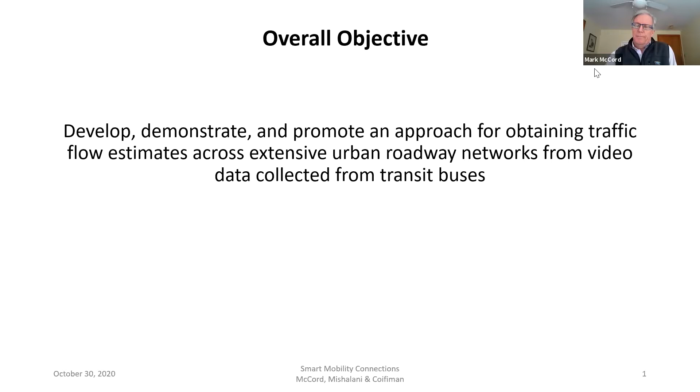I've organized this presentation to give you a quick motivation for what we're doing, to set the concept that we're presently working under, briefly touch on the methodology that we use to take the video and convert it into traffic volume estimates, and then give some of the empirical results we've collected in what I call a multifaceted empirical study. We'll see why it's multifaceted when we get there a little bit later. And then finally, I'll discuss where we see ourselves now and where we see ourselves going with this in the near future.

By way of motivation, let's just accept as a postulate that traffic volumes are used for a variety of engineering and planning purposes in urban areas. And the traditional way we go out and get traffic volumes is what we like to call fixed location sensing. Whether we send our students out over here on the left to sit there and count vehicles as they pass, or click on vehicles as they pass, or we put road tubes down on the right, we're talking about going to one segment, one location, and getting the vehicles through time as they pass.

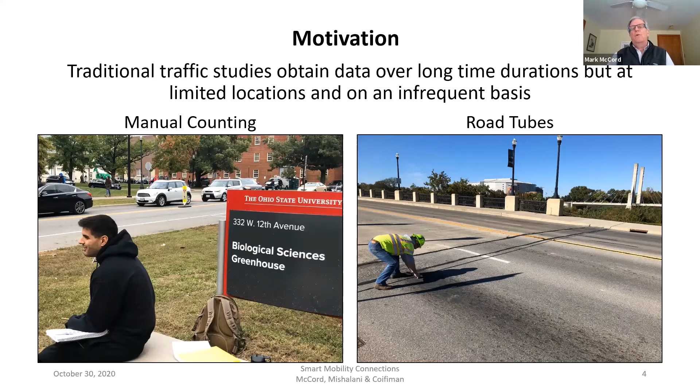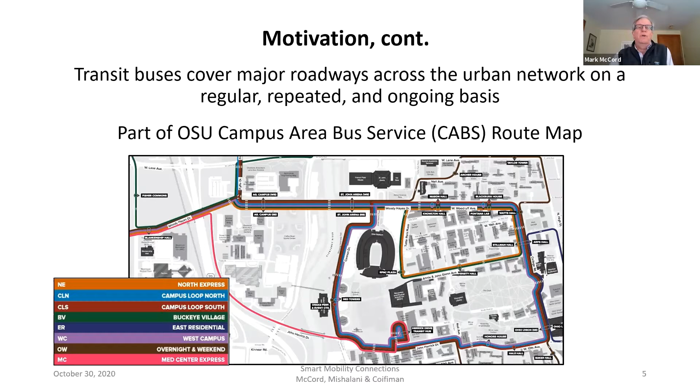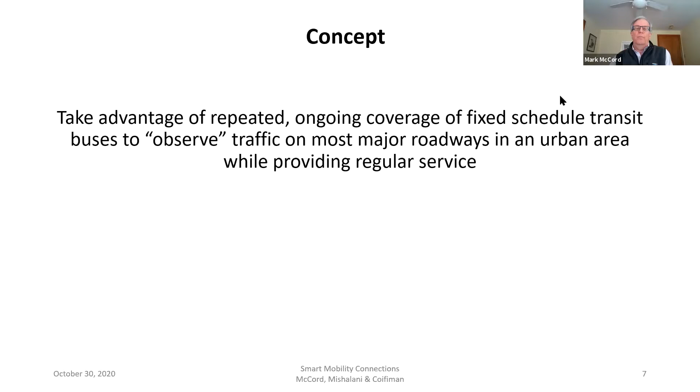So the concept we're working under now is we want to take advantage of this repeated, extensive coverage of transit vehicles while they're out there, to observe, in quotes, we'll see what that means in a minute, the traffic on the major roadways in an urban area. Let me sort of piece this along.

This repeated coverage: I said the traditional way we get traffic volumes, we go out there, think of it as counting or putting a road tube down, and we get data all through time. We get hours and hours of data at this one point. The bus, for example, with its video sensor on, goes by and it's going to see what's happening in a very short duration.

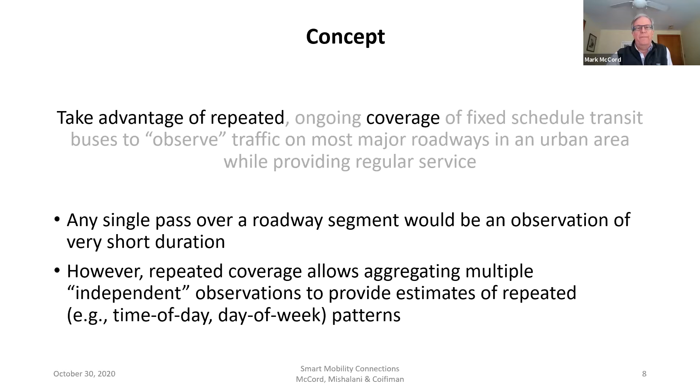So any single pass of a transit bus is going to give us a very short duration observation of the traffic. But because buses go around again and again, cycle after cycle, multiple buses, day after day, we get lots of these repeated short duration observations. And the hypothesis is we can aggregate them to come up with a good estimate of the typical pattern out there. Because it's ongoing, we'd also have the ability to sort of look through time.

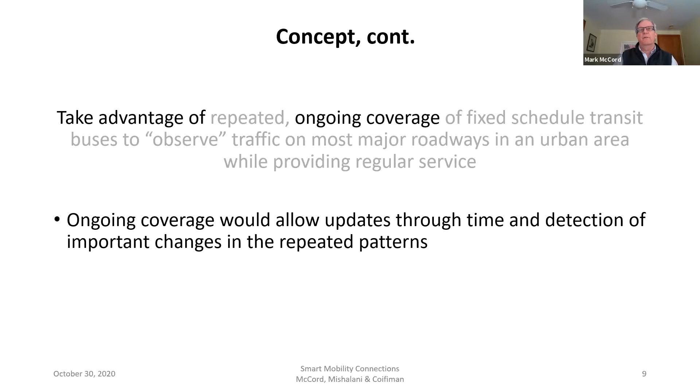When we put road tubes out there, we put them out once in a while, maybe we come back several years later and do that. We don't see what's going on in between. Because we have this ongoing coverage from the transit buses, because they're providing another service, but they're out there anyhow, time after time after time, we can monitor through time.

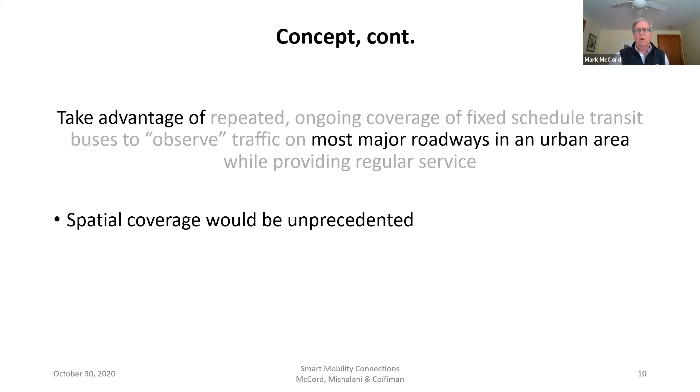Next, we like to say they're covering most of the major roadways in an urban area. Buses travel on the roadways that are of most interest in terms of traffic data. And so we're really getting spatial coverage, which we've never had before from traditional ways of doing traffic monitoring.

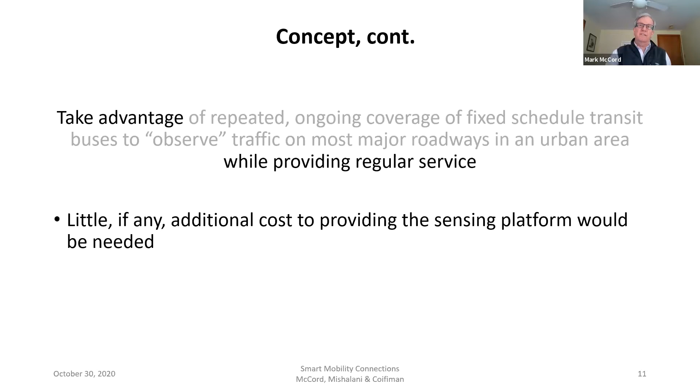And then similarly, because the buses are out there for other purposes, we don't have to pay for the platform. So there's little, I always like to say no, but my colleagues say there's always going to be some additional costs. But we don't have to pay for the platform. It's being paid for because it's providing other service. So we're just piggybacking on the platform. We're not investing in the platform. We'll see with the video, we're not investing in the sensors either.

And then finally, transit buses are a public service. And so the hypothesis here is that because they're in the public domain, it would be a little bit easier, less costly to get their data and use it for public service. We're not going to go through some private company that would be selling the data.

And then finally, as Carly mentioned, we have what we call the Campus Transit Lab at Ohio State. We've been working in transit for quite a while. Transit is a very valuable service, but we all know it's costly and it needs to be subsidized, usually by tax levies that people vote on. So anytime transit can look like what we call a good citizen, in this case providing information for the general traveling public, that would probably be a plus in the overall one transportation system idea.

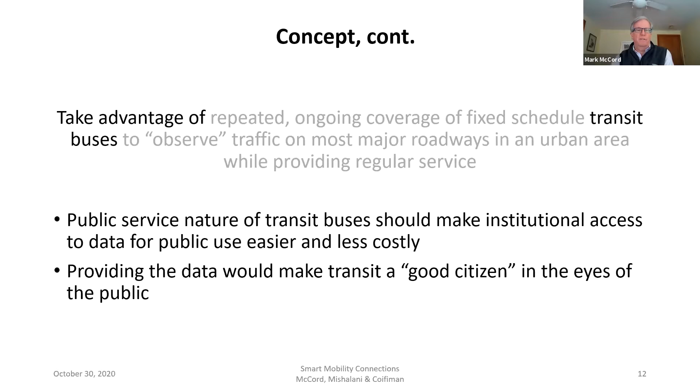So we started this a while ago. Our concept at the time was to take inexpensive sensors, mount them on buses and get the traffic data. And our first take was to use LiDAR sensors. We have real good relationships with the transportation and bus operators at Ohio State University, but we weren't ready to start drilling holes in their buses to put LiDAR sensors on.

So we equipped a van with LiDAR sensors, drove around campus and off-campus roads, got nice pictures of vehicles, and could automatically process the vehicles. We'll get back to that later. That's an advantage of the LiDAR, and we were able to sort of test out some of the concepts we started developing.

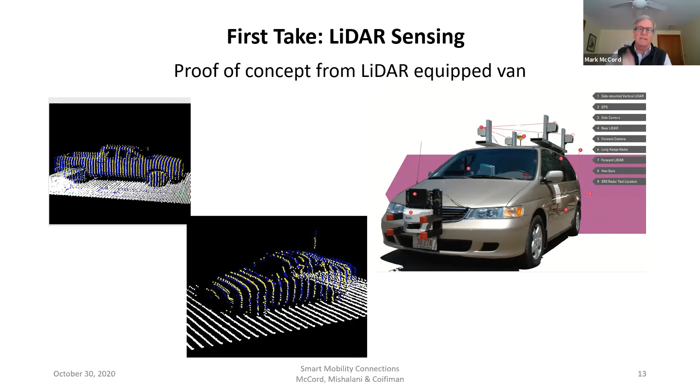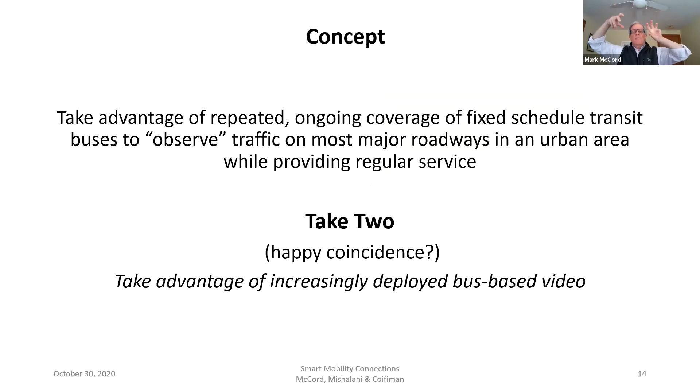While we were doing this, I call it a happy coincidence, transit agencies around the world and at OSU, Ohio State University, were putting cameras on their buses for other purposes. Basically, they put them on for safety, security, liability issues. If there's an accident, what happened? If there's someone hijacking the bus, we can see what's going on, etc. So the cameras, it's important to notice, are not put out there for traffic counts. They're up there for other purposes.

And it just happened that this was starting to take hold while we had developed this LiDAR idea of sticking LiDAR on buses. And so we sort of did a right turn here and said, let's change our focus from the LiDAR to cameras, because they're out there. We don't have to put any extra hardware on the buses. They're out there for other purposes.

Just as a side note, because of our relations with the people that we call transportation and traffic management, who operate the campus area bus service, CABS, at OSU, they were just starting to put the cameras out there, and we've been working with them on transit projects and giving them information for transit operations for several years. And so they were willing to work with us to configure some of these sensors, at least the angles.

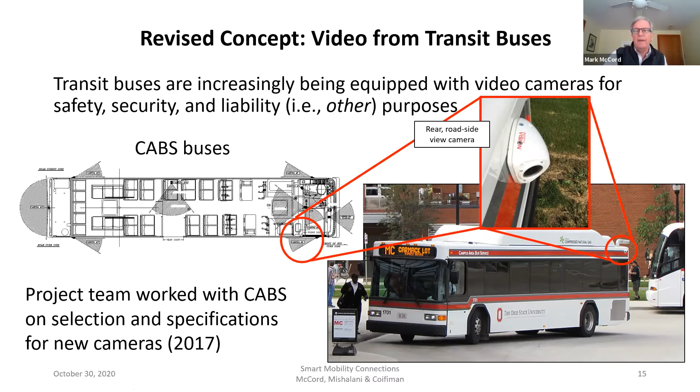We've been using this driver side rear sensor back here that points out. We could get a little better angle. They were willing to work with us with the angle to be able to see the vehicles. Now, that sort of changed our perspective again, from just saying we're going to put sensors on the bus to now our present objective: let's take advantage of the existing video data out there. So as I said in the beginning, we don't have to pay for the platform because the platform's already out there for another purpose. We're not paying now for the sensor because the sensor's already out there for another purpose.

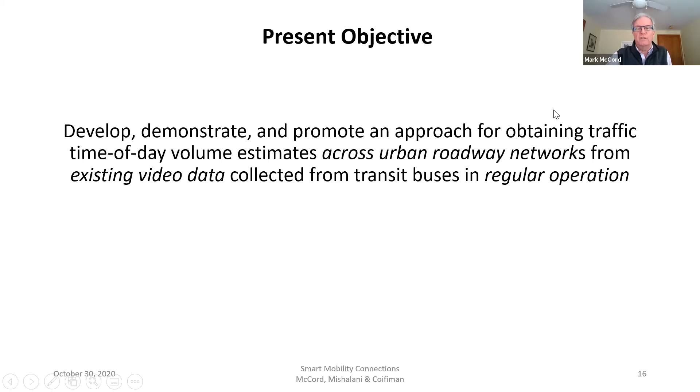Let's try and see if we can get this video and turn it into traffic estimates across our urban roadway networks, and not in sort of a beta test. Let's do it while they're in regular operation and see what we get. So in the interest of time, I won't go into a lot of detail on the methodology, and it's not that complex. It's pretty straightforward once you think of it.

But the basic idea here is right now we're taking the video and we've developed a graphical user interface where we sit there and basically when a vehicle passes, we click. We've been in parallel, and I'll talk about that later, trying to work on some automatic vehicle detection and processing. But right now, the concept is the vehicle passes and we observe it by getting a frame, and we know the location of the bus, so we know where the vehicle is at this frame, which can be connected to time. So we know the locations of these observations.

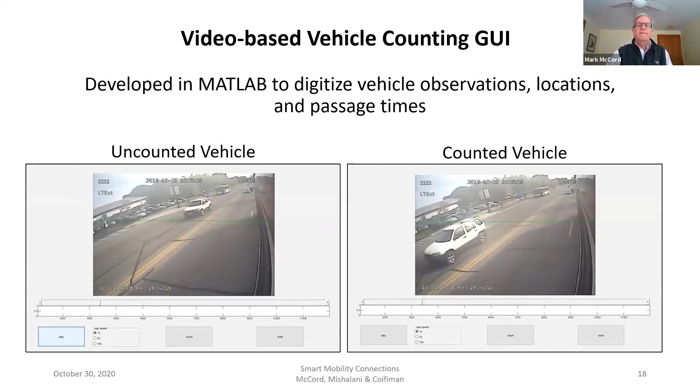Right now, we're doing it semi-manually through this GUI. We are making some progress. We hope to make more with the automatic vehicle detection. But the idea is, as I mentioned in the beginning, traditionally traffic volumes are how many vehicles pass your point over a time, over an hour, over a day, over a 12-hour period. We're not getting vehicles over one specific point through time. We're getting vehicles from what we call a moving observer.

The bus is a moving observer, and there's been some textbook talk and some research studies about the moving observer long before they thought about buses and video on buses to detect traffic. And we had to tweak it a little bit for a bus going in one direction, traffic going in the other direction. So this methodology, I don't want to call it develop, but we sort of modified the traditional moving observer method for observing traffic going in one direction, the buses going in the other direction.

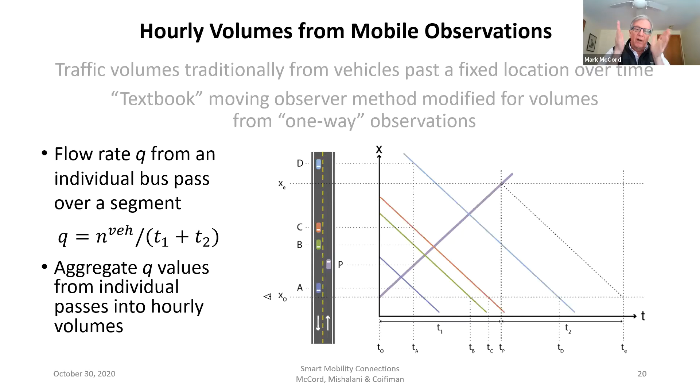And then we simply aggregate the individual volumes in various ways. We're just doing one right now today. We aggregate the volumes in various ways to come up with an estimate for a time period. Today we'll talk about hourly volumes.

So that's the concept. Let me now give some empirical results. I call it a multifaceted empirical study because it serves not only the research component to validate this approach, but the setting for the empirical results I'm going to talk about next is a class term project. And then we actually use the results for an outreach component that I'll talk about. So this empirical study has an education component, a research component, and an outreach component.

And I'll start with the education just because it sort of sets the data collection scenarios. Rabi Mishalani, one of my presenters here, and I co-teach a class called Civil Engineering 5720, Transportation Data Studies. It's an elective course by civil engineers. Some city and regional planners take it. Civil engineers, undergraduates and graduates take it. City and regional planners, graduate students take it.

The idea is to look at traditional and emerging data: how do we collect the data? How do we analyze it? And because of this project, our concept here of emerging data sources, basically bus-based video, turning them into traffic volumes, it fit nicely into this course. And so we developed a term project. This will be the third year this year, where basically we estimate hourly volumes and vehicle miles traveled across campus with traditional approaches that we teach in the class, and then with our bus-based video.

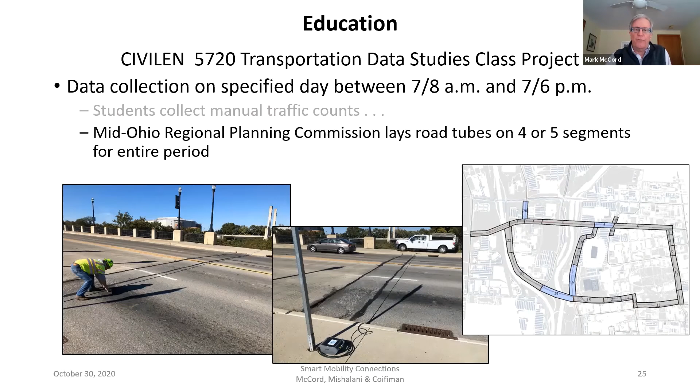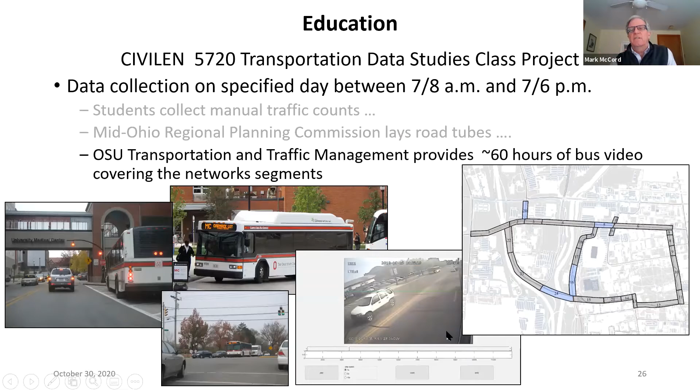So for example, on this network that I'm showing over on the right, the blue segments are where they laid tubes. And so basically MORPC goes down and lays road tubes where we get data; we get them for days, but for this study, we get them for 10 or 12 hours. The students sample by going at different hours across the other gray segments, and then they're going to combine these data with traditional methods. At the same time, on this day of study, OSU, of course, is operating buses all over this network, and we get Sean Roberts and TTM to give us the video. And so we collect about 60 hours of bus video on the day of this study.

The students then in the class, we teach ways for what we call small networks, but it also works for statewide networks. We have these control counts where we get extensive data through time. In this case, it's a road tube. But then we go and sample the other segments for a shorter duration of time. And in short, we superimpose the temporal variability we get from the control counts, the road tubes, on these coverage counts where the students are counting the vehicles, and we can estimate what the volumes are for every hour, every segment in the network. So that's what we teach in class, and so they go and get their hands dirty by actually doing that in the class project.

But then at the same time, they process the bus videos. They help us with the GUI, so we get a lot of labor to process the bus video through the graphical user interface. So we get the data processed and then run the algorithms that we have, basically a modified moving observer algorithm, to estimate the traffic flows.

And then the students basically get the volumes from these two methods by hour, by 12 hours. They compare them, they look at vehicle miles traveled, they look at little different tweaks that we ask, and we refine this every year. But that's basically the class project. And then of course, they report on it and tell us something about it.

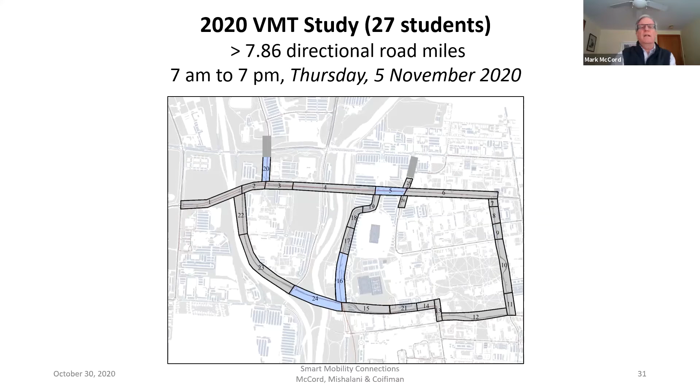And then in 2020 we're going to do it again. We were going to collect the data yesterday, but it was really raining, and we got MORPC and TTM at OSU to agree to put our big data collection to next week. So we're planning on doing this next week. And if you can see by my pseudo animation, we're adding a few more segments this year.

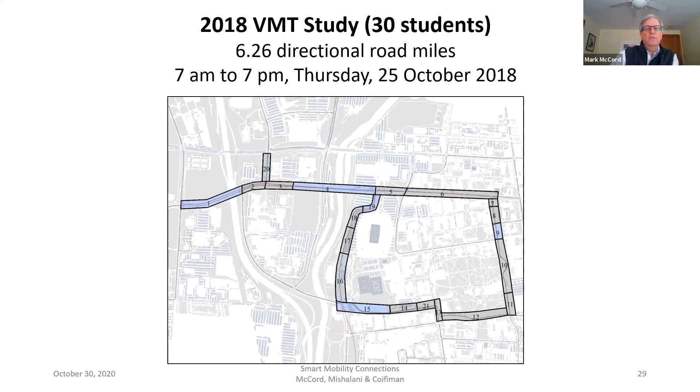The results I'll talk about are based on the 2018 study. We have results for 2019. They look very similar to what we got for 2018. We just haven't combined them in a way that's user-friendly at this time. So I'll emphasize the 2018 study, which is this network from 7 a.m. to 7 p.m. last Thursday in October.

So, as I said, you're not expected to read this. It's small, I understand, but the goal is just to give you the idea of what we have here. These are the road tube segments. And as I said, MORPC, Mid-Ohio Regional Planning Commission, put down road tubes on 5 segments, 2 directions. So we have 10 segment directions here. And the road tubes get volumes. They get them every 15 minutes. But for this study, we combine them into a 7 to 8 a.m. volume.

So on segment 2.1, again, I don't think you can, well, I can read it. Maybe you can too. The road tubes said we had 278 vehicles going in this direction on segment 2 between 7 and 8 a.m. Our video volumes, which were obtained by 3 buses passing during that hour, different routes or the same bus can pass the segment twice if the cycle time is short enough. We averaged that and got 275 vehicles. That's the volume in that hour. 8 o'clock, etc. So we do that for every hour. We do that for all the segments with road tubes.

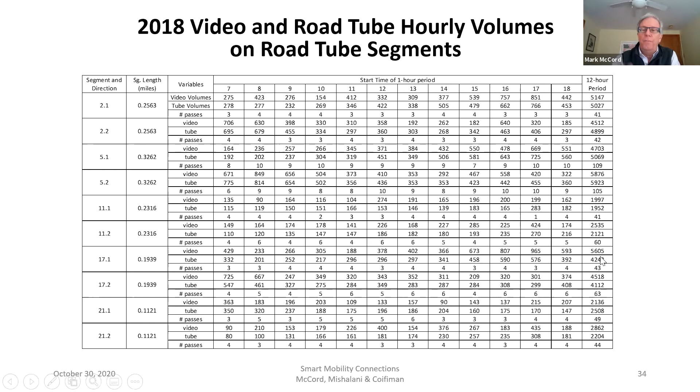And over here, for example, we sort of say, well, what's the 12-hour volume? If I were to estimate what happened from 7 a.m. to 7 p.m., we simply add up these numbers. And so from the video passes, we get the hourly volumes, add those up, and we get a 12-hour volume. On segment 2 in this direction it was 5,147 vehicles. The road tube said there were 5,027 vehicles. We do that for all the segment directions where we have road tubes.

And rather than just look at them, I gave you 2 numbers there, one 12-hour and one 7 a.m., and say, hey, that looked pretty good. Let's quantify the differences and look at some performance. So we have what we call the relative difference, where we take the video volume for the hour, subtract off the road tube volume for the hour, or eventually for 12 hours, and divide by the road tube volume. So it's like the difference relative to what you would have gotten from the road tube.

And we call it difference rather than error because the road tubes aren't perfect ground truth either. They have errors. Anyone who's worked with road tubes knows they don't get exactly the counts out there. So we just call them differences, but we're using that as the reference against our video volumes. And then we take the absolute relative difference, which is basically the absolute value of this.

The RD is going to tell us if there is a bias, because of the sign. If it's positive, it means the video data is producing higher volumes than the road tube volumes. If it's negative, it means the road tubes are giving us higher hourly volumes than the video volumes.

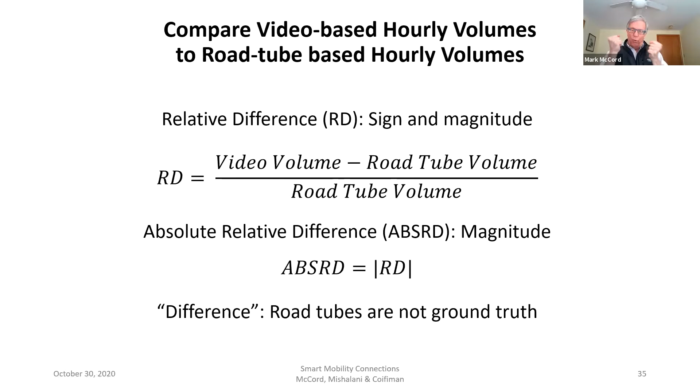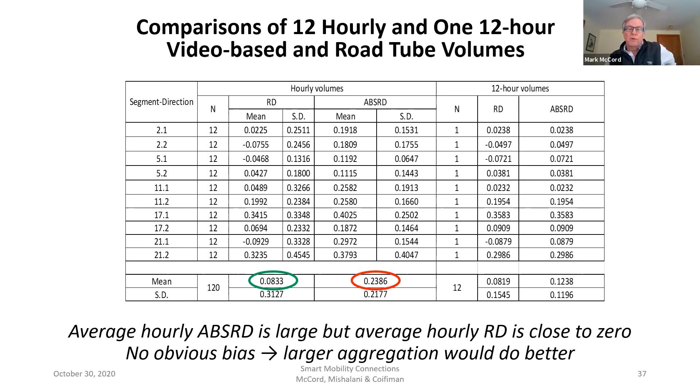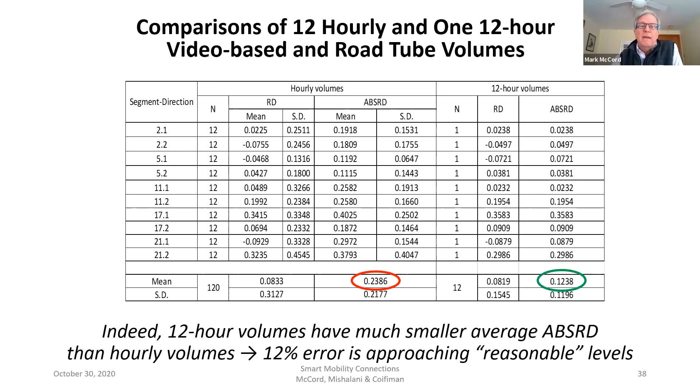The hypothesis here is that aggregating over larger periods may allow these positives and negatives to cancel out. And sure enough, if I look at the difference between what I get for a 12-hour volume on this segment direction from the road tubes and from the video, the average magnitude there is getting close. It's 12% in this case. When I used to do AADT estimation, statewide stuff, people would often say, hey, if we can get it to 10%, that's pretty good. So we're getting pretty close in terms of a 12-hour estimate. And the point here is we're doing this with only a few bus passes.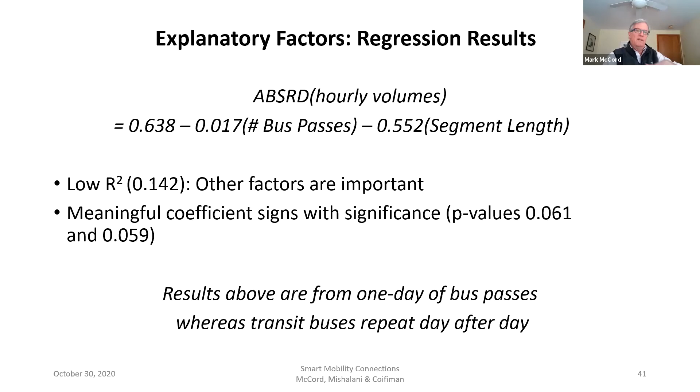So we regress the magnitude of this difference as a function of the number of passes and segment lengths. And sure enough, the results are encouraging. As the number of passes goes up, the error goes down, the negative sign. As the segment length goes up, which is sort of a longer duration observation, the error goes down. And we're getting significant values, et cetera. And so remember that we're going to get more and more bus passes if the buses are out there day after day. I was kind of speeding through this to leave some time for questions.

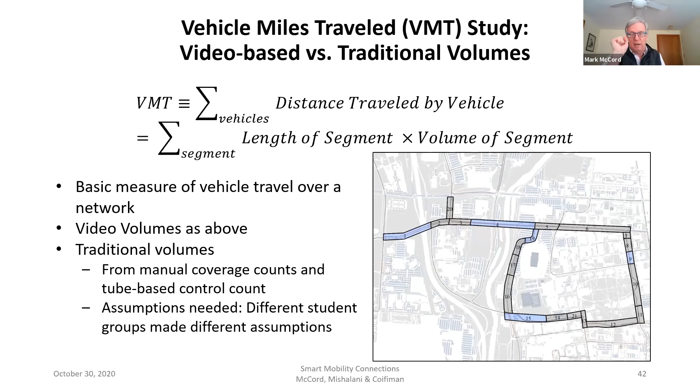But in addition to getting the hourly volumes, we're also interested in the vehicle miles traveled. Vehicle miles traveled by definition is I sum the distance each vehicle travels and just add those all up. But the way we usually calculate it, we get the length of a segment and multiply it by the volume on that segment. So we're going to get vehicle miles traveled in two ways, one with our video-based volumes and one with our traditional-based volumes. I'll skip the motivation, but vehicle miles traveled is the most basic parameter of how much travel there is across an urban network or any network.

And basically, if I only looked at the road tube segments and looked at their 12-hour VMT based on the video, I get 9,581 vehicle miles traveled. Traditional from the tubes, 9,221, only a 3% difference. Again, this is because of these positives and negatives, and we're getting longer time periods. We're getting very good estimates of VMT from our video-based data, or at least very close to what we would get with the traditional way. Remember, for the overall network, we had to get it with coverage counts.

In the interest of time, I won't go through the methodology again, but there are some assumptions that need to be made. And so we let the students, which are pretty advanced students in engineering, make their assumptions, and their range of the VMT based on the various assumptions, across the different student groups, was between 20,000 and 25,000. The average of their 5 or 7, I think, VMTs was 22,000 across the entire network.

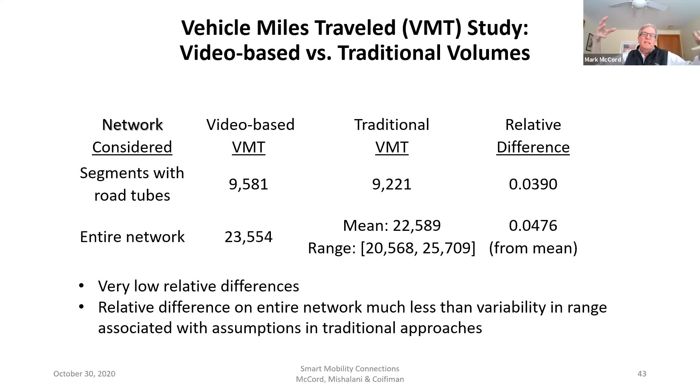We got 23,500, a difference of less than 5%. And to me, even more interesting, based on the assumptions, they're getting a difference of like 5,000, about a 20 to 25% difference here. And our difference is just 4%. So it bodes well for getting VMT from the video-based data.

Finally, we did this education component set in the class. We got these research numbers and precise relative differences from the research study. The outreach component: basically OSU is a large campus, one of the largest single campuses in the world. It has lots of different land uses. In short, it functions like a small city. That's why we call it a living lab. We like to think of it as an urban city.

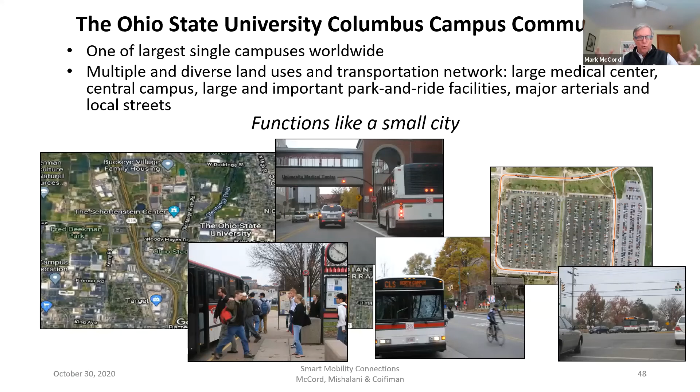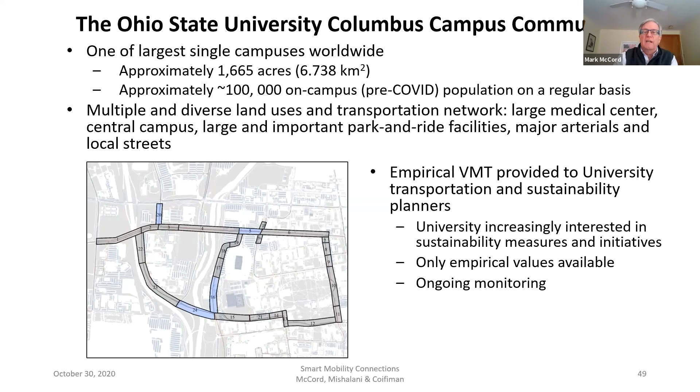Policymakers are getting more and more interested, not just at OSU, but I'm sure everywhere, in environmental sustainability. They don't have monitoring data for VMT. So we provide the VMT we estimate; now that the video VMT looks very much like the traditional VMT, the video-based VMT we provide is the only quantified data they have, measured data, I should say. They do surveys and ask how many miles did you travel, et cetera, but this is quantified. So we call this an outreach function where we provide the university with VMT estimates.

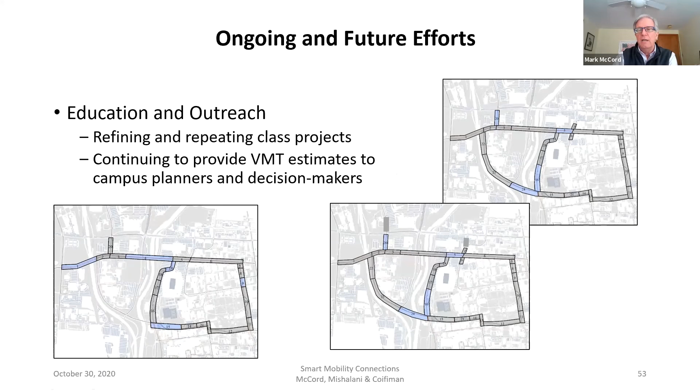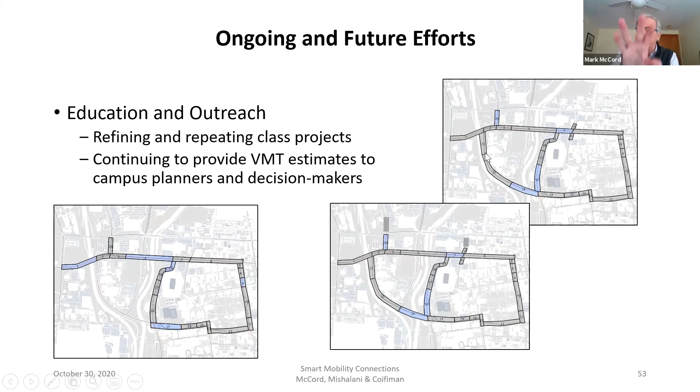I'll just take 2 minutes here to show you where we are and where we're going. Remember, we see this as education, outreach, and research. On the education study, we're repeating the class project. This was the year on the lower left that I talked about. We have the data, we just didn't compile it for today for 2019. We're getting our data a week from yesterday for 2020. So we repeat the educational experience 3 times, obviously with different students; no one's repeating the class. We continue to provide the VMT to OSU in the outreach function.

On the research side, this was an empirical study. When you do empirical studies, especially first-time empirical studies like this, it's good to repeat them and see if we get the same results. So that's what we're doing. Our 2019 results look very similar. No differences in the punchlines. Maybe our 23% error becomes 24% or something like that, but we're getting very much the same results. Our 12 hours are looking very good. The hourly volumes on their own aren't good yet, but that's because we have a small number of passes.

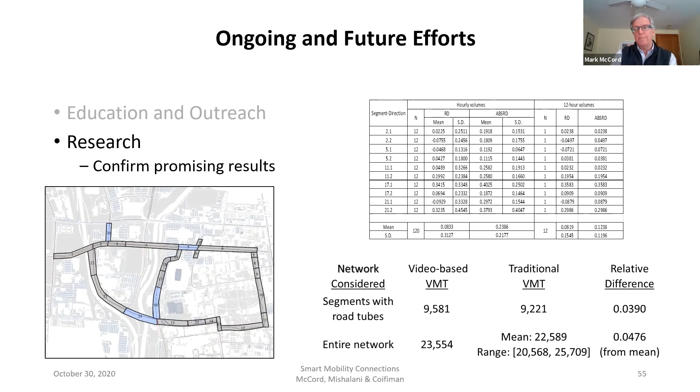We want to determine what's causing the good estimates versus the bad estimates. So we go back and look at the video where we're getting really bad estimates. And basically, as you could guess, when we're getting a really low estimate and the tubes are saying it's a lot higher volume, it's just some random approach where we didn't see any vehicles with this one pass. We think we know how to correct that in the methodology. When the video is a lot higher than the tubes, don't quote me on this because it's kind of new, but it looks like that's where queues were backing up on the street, and we're trying to figure out how to handle those.

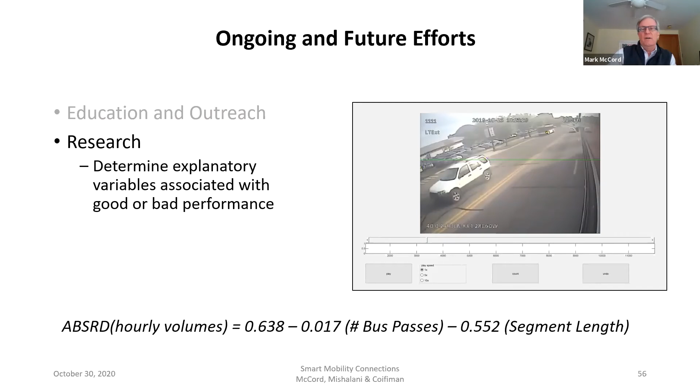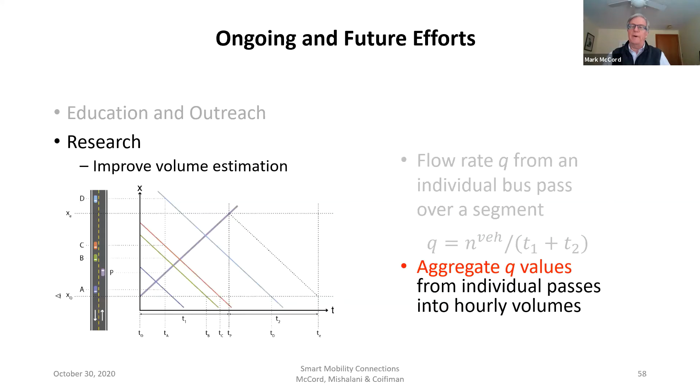The other thing we're working on is, when I get the data from an individual pass, can I get a better estimate? I won't belabor the point, but it's basically the number of vehicles the bus sees divided by the time the bus takes this way, plus an estimate of how much time it would take this last observation to get down here. Our T2, we're doing different things with the T2, and some work better than others. We get the values from every bus pass. How do I aggregate the different values? The ones I talked about today, we just took a simple average. We do a weighted average and it looks better. We have other things in mind to improve the estimates.

And then the whole motivation for this is, well, let me put it this way. When we go with our GUI and click on this and produce the results, it's probably less time and less costly than doing one traffic study.

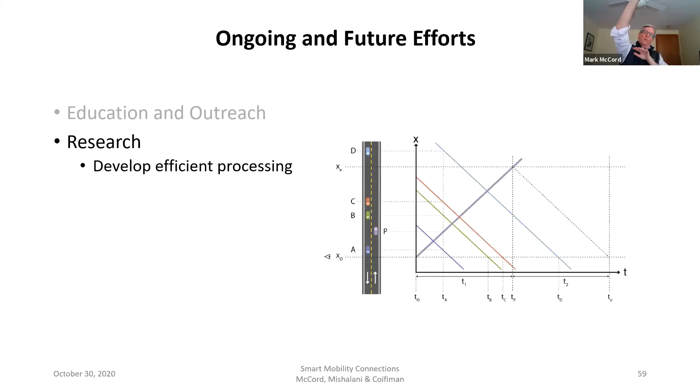We can talk about that, but it's even with our GUI. But the motivation for this is that we're going to get this all over the urban network, and we're going to do it through time. And so we need a more efficient way to process the data, and we're working on some automatic vehicle detection. We started discussing with Christoph Mertz and his team over at CMU. We're trying some other things over here.

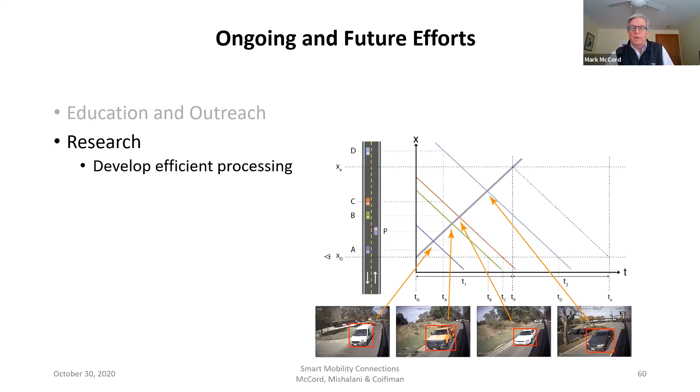This is a parallel project. This project I'm talking about today is just trying to demonstrate that the approach will work, but then how do we get the data efficiently? So with that, I'll stop and just say that it looks like the results are promising. You can read this.

We've been doing this now and extending. Again, OSU is a large network. It's still not as large as Columbus or Pittsburgh or Los Angeles or something, but we're trying to demonstrate that this could be used on an extensive network

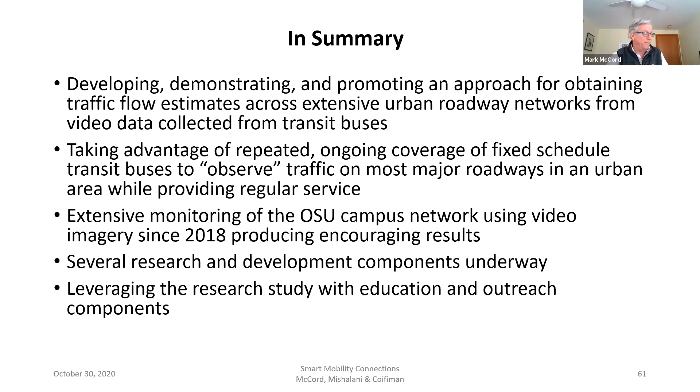and provide meaningful information. We've got several refinements underway, research and development, but again, we think it's kind of neat the way we're leveraging this research study by bringing it in the classroom as a class term project, but also taking the values that we're already producing and giving them to the planners and decision makers at the university.